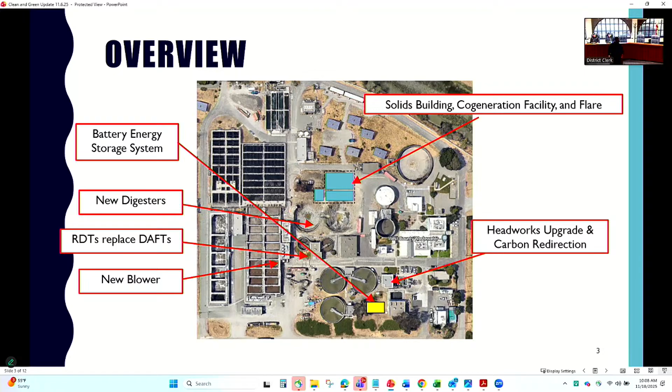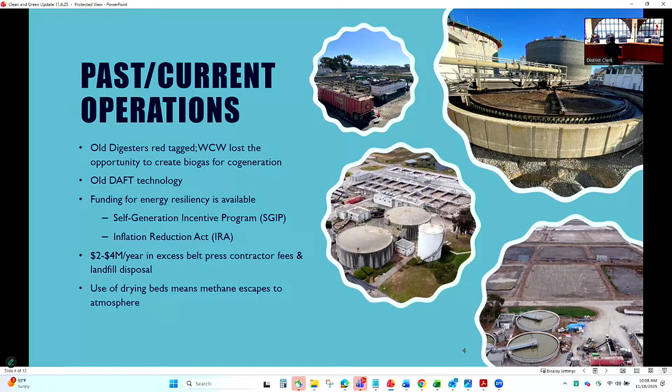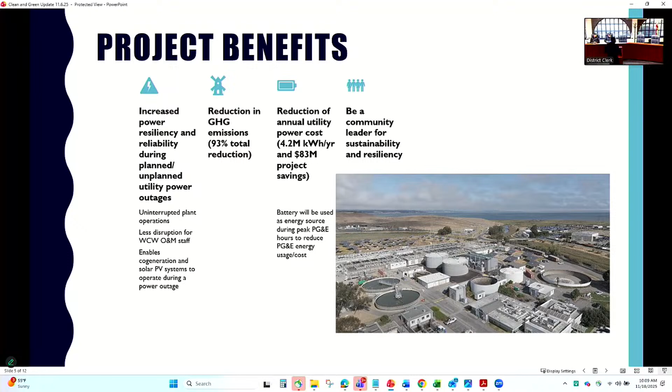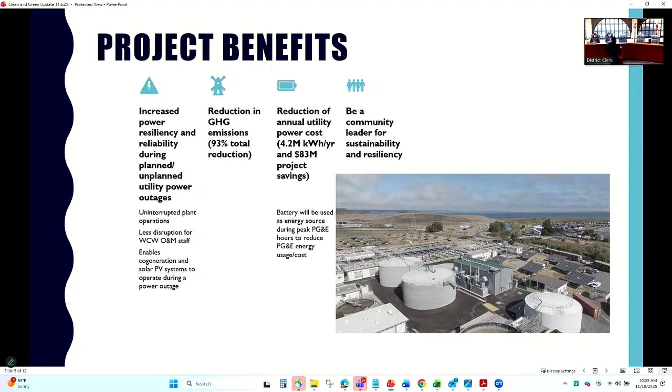About how to move forward in this new environment, and we've been able to do that. We've had multiple individuals from all over the country come visit our treatment plant because it's a unique project and a unique undertaking that you all reflect.

EQ basin. So we do have our new EQ basin. This is a picture prior to it being used over the last few years. We've had the benefit of using this, and that's kind of prevented us, especially last year when we had a lot of rain, from having an overflow. We've been able to have an additional 24 million gallons of storage, which brings us up to upwards of 60 million gallons of storage.

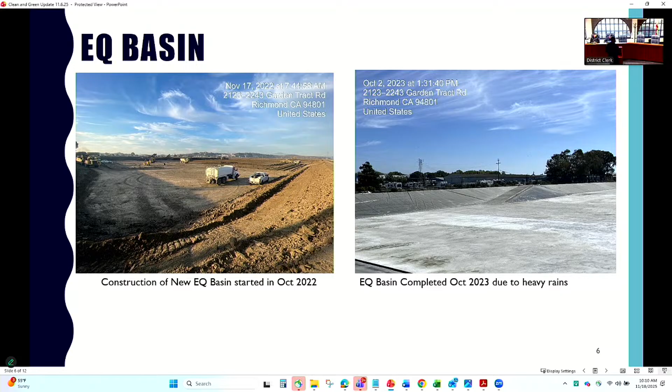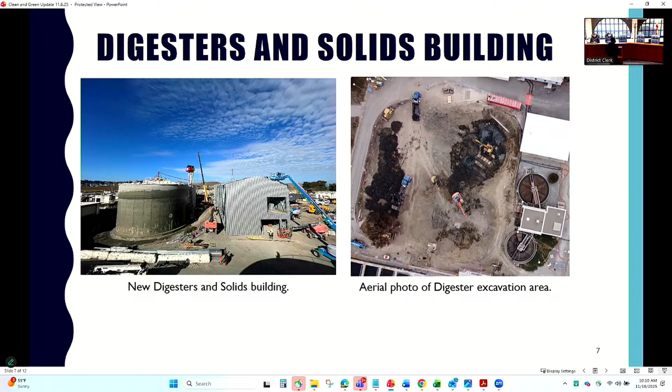Our digesters, solids building - that's it in its old stage. Newer pictures, it has a little more activity around it. We have our new cogens and other pieces of equipment also installed here. But you can see from the aerial photo the amount of work that was taking place here so far.

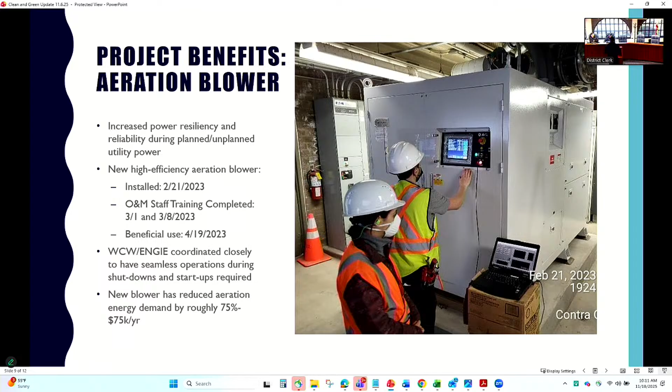Some of the challenges - it's been a fast-paced work environment. A project like this normally, just for reference, I've seen take 10 years, and it's much smaller, like half the size of what we're doing. We'll be able to do this in less than 5 so far. Because it's a fast-paced environment, that has caused some issues with communication as well as maybe decisions on equipment that was installed that has to be revisited at this point as we're doing commissioning, but that's part of the process with this kind of fast-paced environment.

Permit impacts - we've had a couple of those, mainly with the Air District. It was a struggle, but we received it, and we've been thriving moving forward. Staff turnover - we've had a lot of in and out, especially on their side, that caused some challenges here, but we've been able to meet them. They have caused some high-level challenges.

Design issues, mostly in the solids train - delivering of the solids to be transported off. Those are things we're working out now, not so much other parts of the plant. Those have been pretty successful, kind of event-free, but the solids train gave us some challenges that we're currently working through.

Facility constraints - we had to maintain an operating treatment plant while doing this massive construction project. That's been some things. I'd say 2 of the 4 years, storms have definitely caused some impacts with us, the amount of rain limiting our ability to do work outside. Now that we're in a dry-in kind of situation where we're inside of buildings, we're protected from that moving forward.

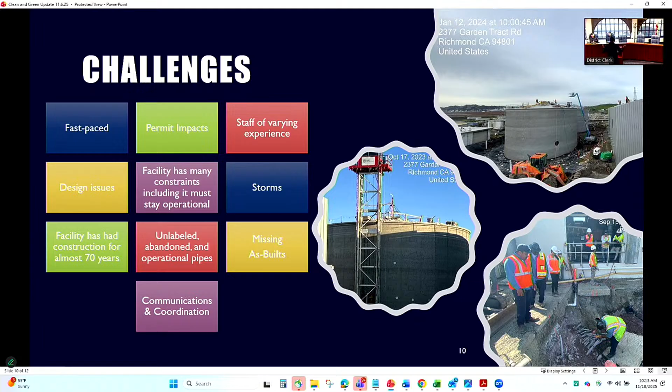I would say, other than that, missing as-builts is probably the biggest thing on this list. We didn't have a lot of understanding of what is happening or what's underground, and that caused some issues early on. But we're at a point now where we've mapped out everything in our immediate area, so we don't really have that issue moving forward. We shouldn't have it moving forward.

So I will leave the floor open to questions regarding the Clean and Green project, and do my best to answer them. Okay, thank you for that presentation.

President Rentila, questions, comments? I do, and if this is not the appropriate time to answer these questions, that's fine. We have an agenda item tomorrow evening regarding the PSLA. But my question is, we've seen a lot of presentations talking about what we have and what we're expecting as far as moving parts of the plant. We're in transition. My question is: our plant hands have a limited skill set—what's the percentage of work that our guys can do right now, and what's the percentage of work that outside contractors are doing?

I would say mechanically, we could do most of that work, but there are some contractual obligations from Optera, mainly concerning some major pieces of equipment like your cogens, gas cleaning skids, and dryers. I believe for a certain period of time they will manage that, and then our people will shadow them and learn how to manage it. After that time frame, it'll be our responsibility. Things like the gas cleaning skid are pretty dangerous pieces of equipment, so moving forward, contractually I think we'll have to have someone else come in and do that part. But most of the mechanical things, like the pumps, they've already started doing some of that maintenance. Percentage-wise, I'll let Andrew talk more about that, since they're already doing work on building that out, and I don't want to overspeak without the proper information.

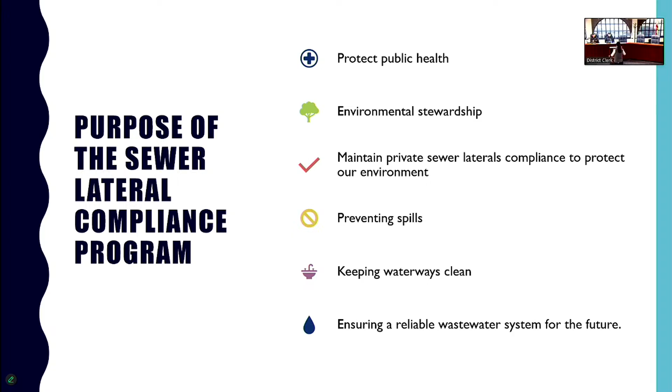And when we talk about sewer lateral compliance, I always like to package it together with the outreach program, because as much as we want to do, we want to ensure that the community is aware of how important sewer lateral compliance is. And so in addition to events in the community that we participate in, we also attend the El Sobrante MAC, North Richmond MAC, and East Richmond Heights MAC.

MAC is an acronym that stands for Municipal Advisory Council. These are meetings organized by the county supervisor, and we have actively asked to participate in this type of meeting where we can meet with community leaders and residents in our service area. So this is just the schedule of what we have done in the past and what's upcoming in the future. In December, we're going to attend the North Richmond MAC, and in January is the East Richmond Heights MAC.

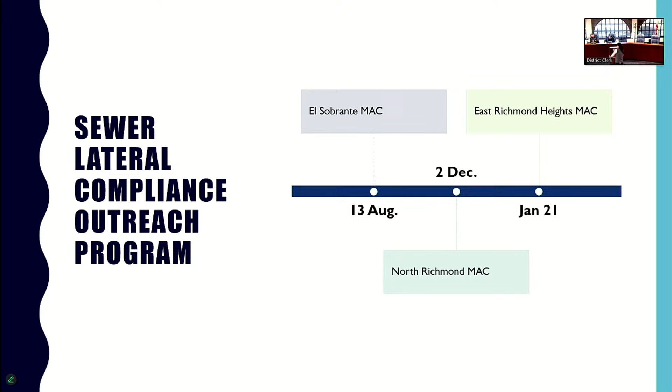Now, the PIPES program. Again, PIPES stands for Public Incentive Program for Efficiency of Sewers. I want to take this opportunity to thank West County Wastewater, the board member approved the incentive program in 2020, funding $400,000 year over year to support residents who would like to repair or replace their sewer lateral. And so this is really a program appreciated by many residents.

They have asked questions and submitted their applications. And here is just a table to show what the threshold is and how much they can get for reimbursement. For those in high I&I areas, which is inflow infiltration areas, they can get a maximum of up to $4,500.

So there are certain criteria and certain paperwork that they need to submit, but nothing difficult. It's really typical, showing proof of residency, showing proof of property owner information, and getting a quote from the sewer lateral contractor. Then we will issue the pre-approval letter, and they can go ahead and do the repair or replacement. Once that job has been completed, we issue the certificate of compliance, and that's when we will reimburse the resident with the dollar amount shown on the table.

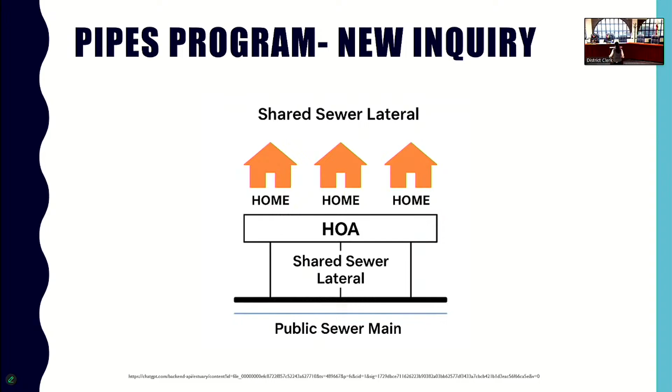That's absolutely right, Director Rintila. You just mentioned something about how we reimburse to the residents as well. So if they have a lateral longer than 100 feet or deeper than 10 feet, that's where they will get the maximum reimbursement. We put that into consideration, and the board agreed with it and approved a different reimbursement table. Yeah, thank you.

I just also want to say that this is a great investment into the community as well, but also helps us reduce our emergencies in the community. So we really appreciate this program continuing.

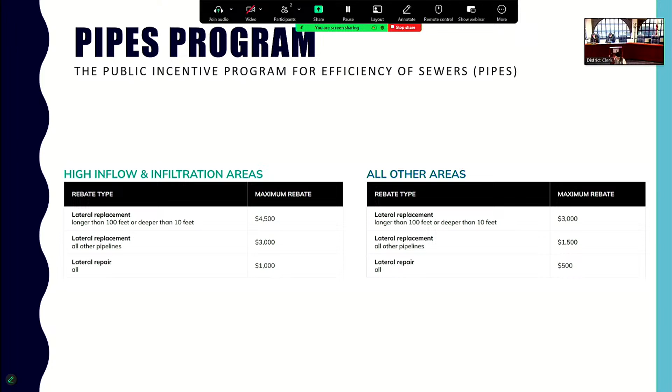Next on the agenda is item 4, reports on issues or matters pertaining to the work of the committee.